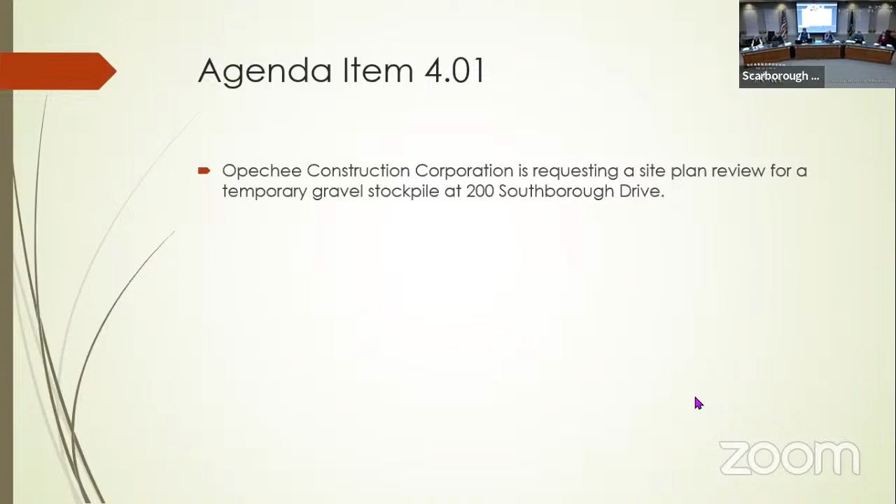For the construction company - please give us your name and your position in the company. Thank you. Hi, Maureen McGlone, I'm with Ransom Consulting, representing Opechee tonight. I am the program manager for the civil and coastal design team within Ransom. Also with me tonight is David Shearburn from Opechee Construction, if there are any questions with regard to future plans.

So I guess as Eric mentioned, this is probably one of the least controversial site plans I've done. We're looking to put in the gravel preload for what might become a new building. The geotechnical engineer, after reviewing the geotech reports from both the Homewood Suites and Sebago Brewing, requested that we do something a bit outside the box - a field consolidation study rather than a lab consolidation study, whereby we'll put the preload on. They're going to do some evaluations, monitor it on a weekly basis, and then make recommendations as they move forward, which could be additional preload or design considerations for the proposed structure. And that's pretty much it.

Thank you. This is an item that is subject to a public hearing. Is there anybody in the room or online who would like to make a comment on this application? There's no hands raised online. All right, in that case, I declare the public hearing closed.

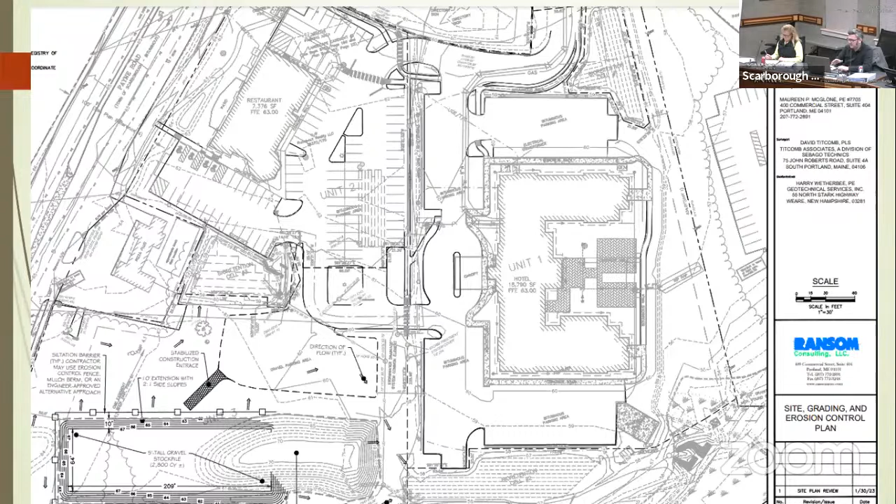And as an engineer myself, I understand the necessity of preloading an area before you start pouring slab and putting a building on it. What I would like to see is what the actual building is going to be and look like. I've gathered it's going to be a hotel, but I would just like to know the conceptual massing, rough approximate quantity of parking spaces, and what the traffic routes are going to look like in and out of that. Okay, so yeah, that all makes sense.

There's—we are in the process of coming up with that and finalizing that conceptual plan.

All of the traffic is going to be routed through the existing Southborough Drive entrance so that we're not having traffic going in and out of Payne Road, with the exception of maybe construction vehicles off the existing curb cuts. The idea with the preload also was that we'd bring gravel to the site, while removing the loam pile that was left there after the 2007, 2008 construction of the Homewood and Sebago. So that's another consideration, wanting to remove that pile as well.

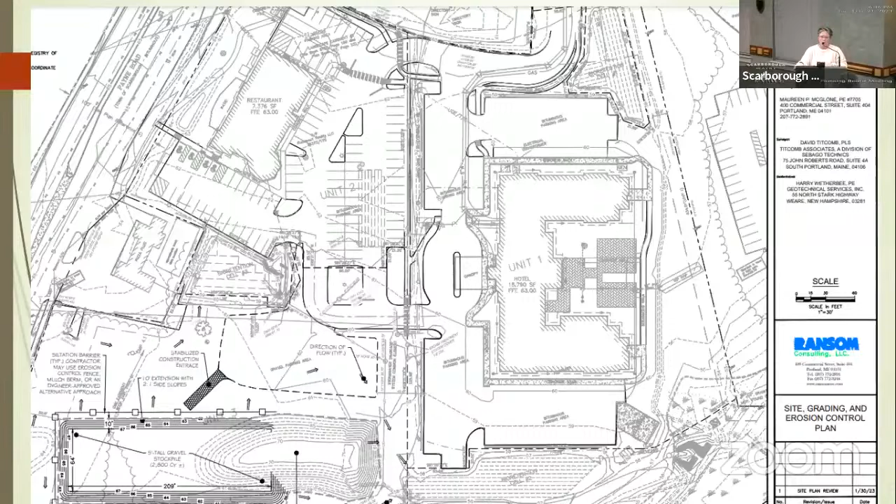Certainly, we can submit a conceptual site plan. I brought a hard copy of the conceptual, I can share that with you. While we appreciate it and we'll take a look at it, that needs to be submitted in the appropriate fashion as well.

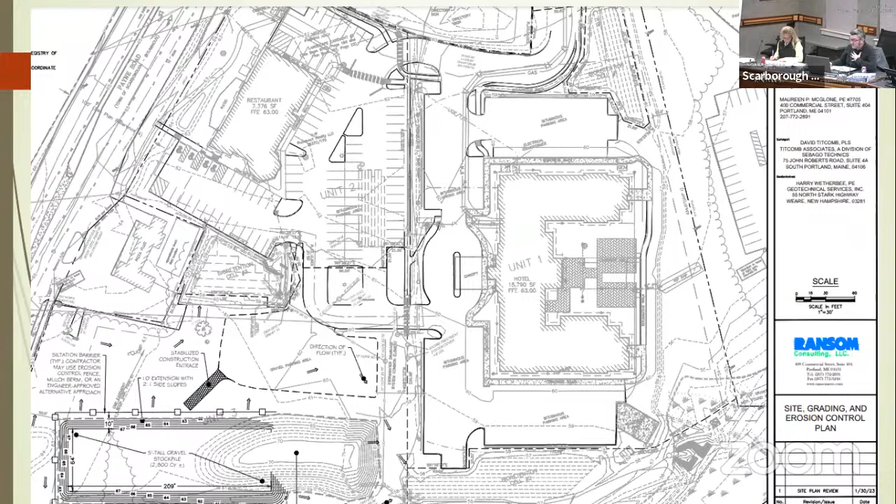Thank you for this. So I guess from my standpoint, I'd like to see this incorporated as part of our packet, potentially for our next meeting, or as soon as possible, along with any other piece of information that my fellow board members are requesting. I would like time to review that before making any decision on it, for me anyway, to feel comfortable.

I'm David Sherborne, architect and vice president of OPG. We know that this is a unique scenario that we have here. When we saw the staff memo recommending the performance guarantee, we felt comfortable with that, because I know there may be concerns that we're replacing the loam pile with gravel on the site, and there's a timeframe tied to that. So if the hotel didn't go ahead, or we didn't get approval with the site plan application, the site would be brought back to its current state.

In terms of the quantity of gravel brought to site, it's tight, it's matched up, and sized to fulfill the need for the actual development when we go to do that, so we're not bringing excess in that has to be trucked off. It's bringing in enough that, as part of this test and preload, would then be utilized in the construction of the site and the hotel itself. We're hopeful that although it's unique and at risk, it's designed to help expedite construction and get the ball rolling, and that the town would be comfortable we're taking the steps necessary with the guarantee in place to move ahead down this path.

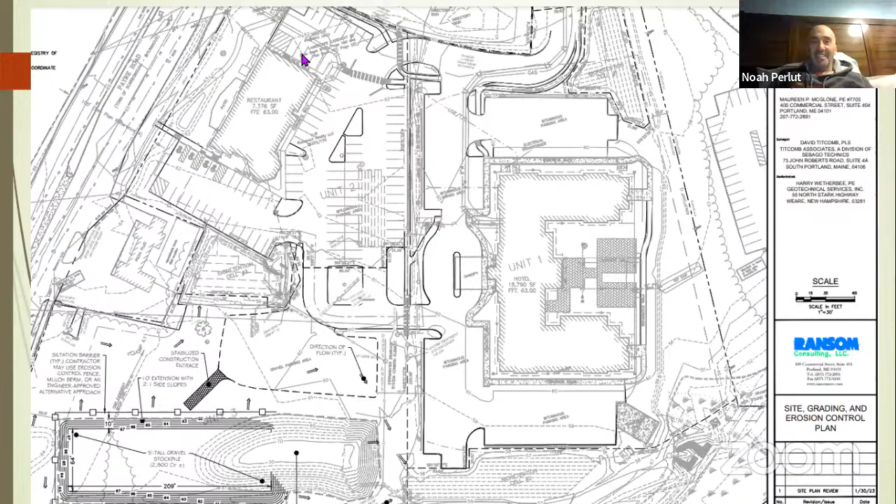Thank you. So let me suggest that you fill out this application in more detail. Give us a time frame, a phasing for the hotel construction. More information about what you propose to have there. Right now you're talking about a proposed hotel, 4-story, 113 rooms. As we start to look at that, we're also going to start to see whether you've planned adequately for parking and access to the hotel. So there's a lot more stuff that's going on here.

I understand that you would like to get things going faster, that you would like to get some things determined in time to do perhaps a good build this summer. But we meet every 3 weeks.

Are you suggesting that we can still maintain a separate application for the preload itself? Or are you suggesting that it not be a separate application, that it be part of a larger site plan application, a larger sketch plan application - not the full site plan, but enough on a sketch plan application that includes what's going on here, the hotel, the access, a bit about the parking. Certainly, I think you've heard that there's a lot of concern about stormwater and the direction that it's traveling because of the proximity of Red Brook.

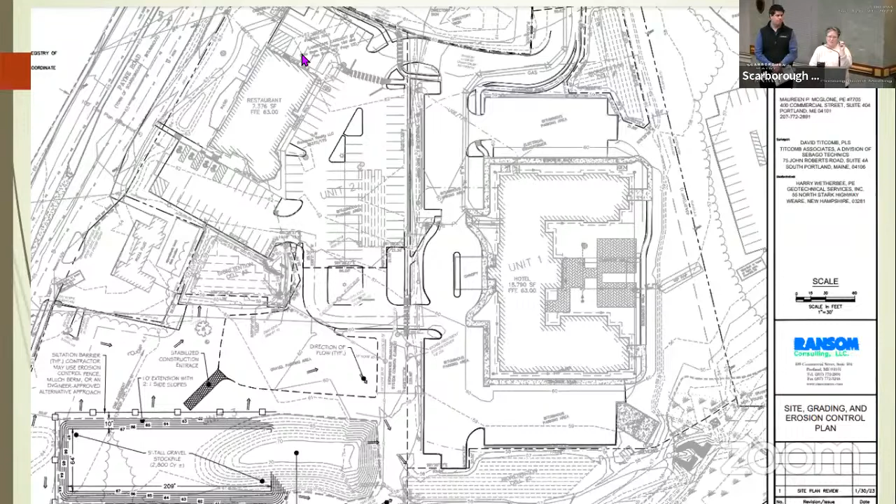Believe me, I would like to see something there as well. I did the Homewood Suites as well as the Sebago at that time, and I've been waiting. Well, we approved another thing there a while ago, and then I heard when this came forward that they had withdrawn their application. So yes, we would like to see something there. I think we're all waiting.

I think we can get there. I really do think we can get there, but we need to have the comfort that the ordinances of Scarborough are being followed, that the site is being protected, that our wetlands are being protected.

I look forward to seeing what you bring back to us. Sure. Thank you. Thank you very much.

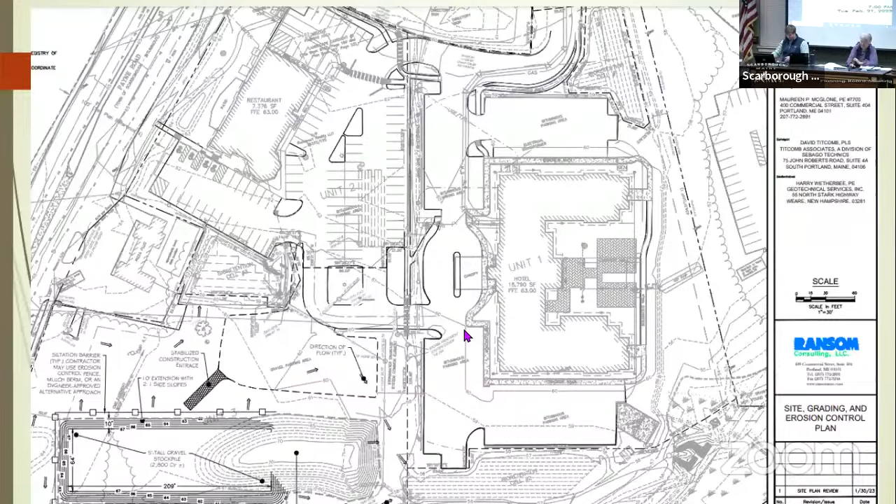Next item on the agenda, and this is a really short agenda. MEVS Solar requests a utility scale solar site plan review for a 1.95 megawatt AC solar project on land behind 22 West Beach Ridge Road. The property is further identified as Assessor's Map R42, Lot 2D for the town.

Thank you. So MEVS is back in front of the planning board with a revised site plan for their utility scale solar system. At the previous meeting, the planning board had requested that the orientation be revised to provide access off of West Beach Ridge Road, as well as include the 100-foot wildlife and wetland setbacks as recommended by the Maine Department of Inland Fisheries and Wildlife. The applicant has provided a plan that meets those.

It still requires a utility corridor connection via Cranberry Pines Road. Staff has left previous detailed comments in the memo from the previous submission, so if the planning board is comfortable with this orientation of the project, those details can be submitted for the next meeting. And with that, I would turn it back to you, Madam Chair. Thank you very much. And for the applicant.

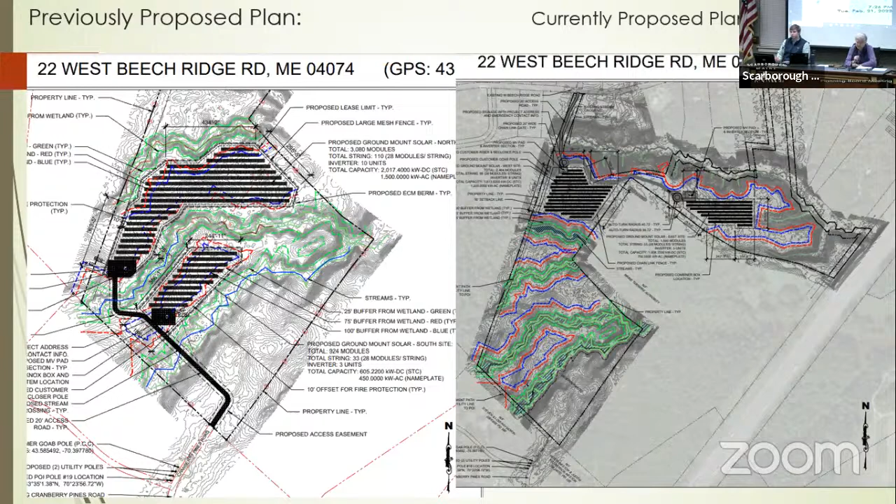I noticed that Haley Ward had a fair amount of comments. I was wondering if you had any questions about them before we send you on your way to complete your application. Yeah, no, I don't think we have any comments. I mean, a lot of them had to do with things that need to be updated on the plan, so we didn't want to proceed with any of that until we had a plan to work on.

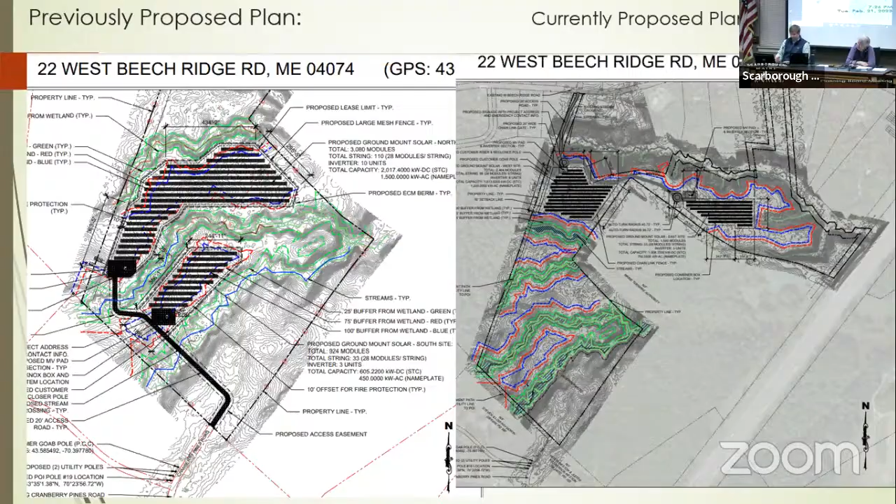All right, are you comfortable? You ready to come back to us with the full plan? We are, yes. Very good, we'll see you then. Okay, thank you. Thank you so much, have a good night.

Next, can't believe I'm saying this at 7:25—next item on the agenda is the staff report.

Thank you. So the next planning board meeting is going to be Monday, March 13th. There are some ordinance changes undergoing review by the ordinance committee that will perhaps make their way to town council in March or April. Those include the fuel cell technology forwarded from the sustainability committee, as well as the hotel motel conversion to multifamily.

In terms of building permits, the subdivision for 124 Sawyer, which was approved in October of 2021, finally got its building permits last week, so they'll be getting underway fairly soon. In terms of certificates of occupancy, Pat's Pizza got their certificate of occupancy—funny enough, they were also approved in the October/November timeframe of 2021. So that's it for the staff report.

I don't know if Angela has anything else. Just, I guess I'll add, there's going to be probably a flurry of ordinances coming up.

We are under a new permit for our federal and state permitting for stormwater management, and with that permit comes more strict and stringent enforcement of our stormwater and erosion sediment control rules. It sounds like this board deals with that a lot, and I think it will give clearer direction and help development navigate that—instead of staff reiterating what you should be doing, spelling some of that out. I think it'll be helpful for planning board moving forward. You'll probably be seeing a few of those over the next six months or so coming through.